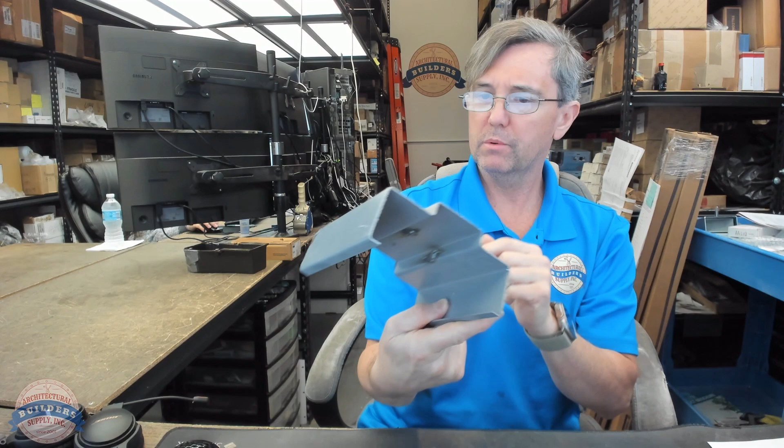So when it comes to masonry frames, you are very commonly going to butt the frame up to the end of a wall. And let me grab a jamb section. And here is a typical masonry profile. This is probably 5 3/4. I don't know who the manufacturer of this is. It doesn't matter. And with a masonry frame, you'll generally take this 5 3/4.

We'll talk about the anatomy in a moment, and you'll probably T-anchor that to a wall that's much thicker than 5 3/4. You could have face brick and block, and all of that together is some dimension like 9-inch. And the important part about a masonry frame is how deep is it, because I need to make sure that frame depth is really compatible with the thickness of my wall.

What's less important to know is what's the throat opening. And in fact, I would argue that it doesn't even matter what the throat opening is. I suppose you could say that, yeah, you do need to know what this size is. And the reason you may need to know that size, I imagine I've been asked that because, in that scenario, you get face brick and then block. The client wants to know how big is that, so he knows where to position this in the thickness of the wall, I suppose.

So it could also be just as convenient to know that the relationship between jamb depth and throat opening is throat opening equals jamb depth minus 1 inch. Except I had said why 4 7/8. On 5 3/4 frames, they will always have a 4 7/8 throat. That's because the return becomes 7/16 from ½ inch. So throat equals jamb depth minus 1 inch in all instances except 5 3/4.

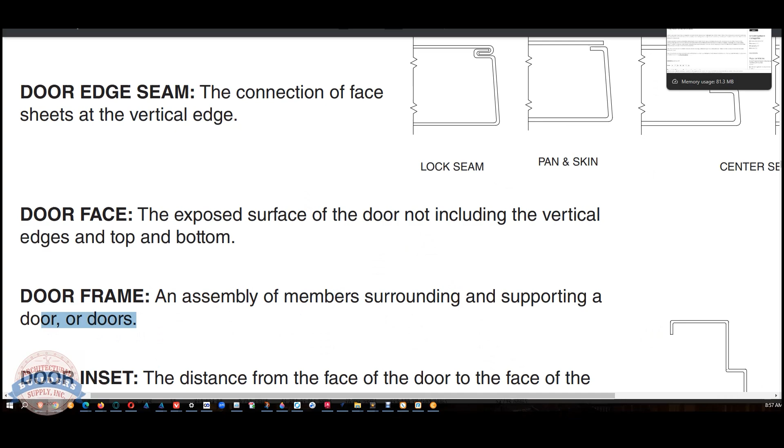Here's our definition: door frame, an assembly of members surrounding and supporting a door or doors. Okay, so let's take a dive into a technical manual. I've been using this DCI Hollow Metal on Demand. I don't know anything about their company, but I like their technical manual. They're probably, I wouldn't say a small size company, but compared to Ceco or Curries, I would think they'd classify themselves as small.

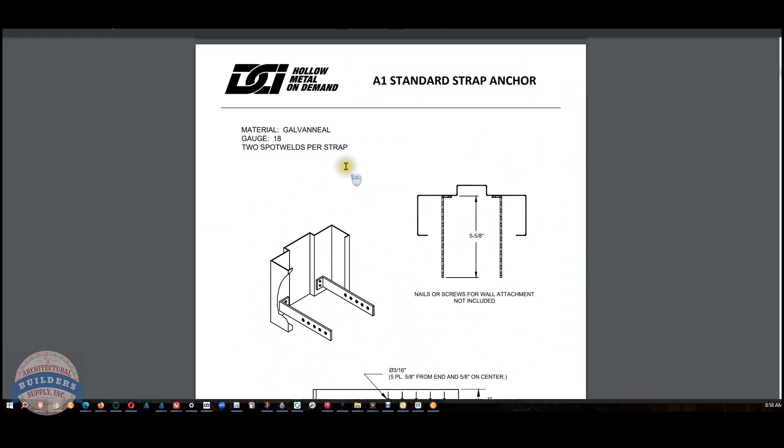Okay, so I had thought about earlier, we have to go through the different anchors that you'll end up seeing. And it looks like the beginning of the section is about frame, so we'll scroll through here and see. So an A1, their standard strap anchor. This is going to be for some type of stud construction, obviously. Probably wood studs would be my guess, is how that's going to be.

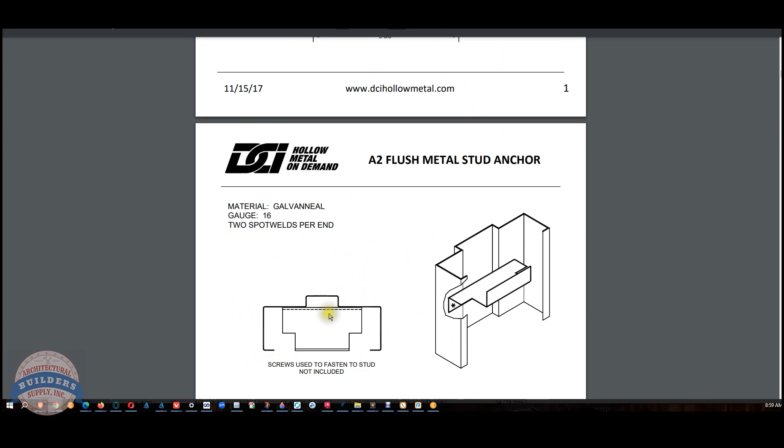Those will be welded in. You'll slide your straps around your stud. You'll screw through the face of those into the stud, and the drywall gets slid over it. Drywall has to penetrate at least 1/2 inch for fire rating. This would be a welded-in steel stud anchor. You'll run tiny mini screws through the back of the metal stud into this flange. Those are always welded in.

Many frame anchors must be welded in. Some frame anchors can be welded or shipped loose, and some can only be shipped loose. This is what I would call a Z anchor. Again, it's a metal stud anchor. Yeah, flush metal stud anchor. Okay, so flush. You'll notice here that this would be for an application where they are going to do all the framing. Probably just slightly larger than the outside dimension of the frame.

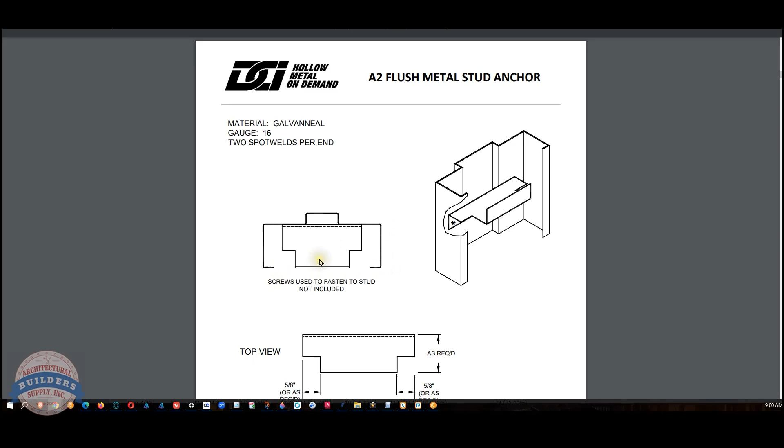Same concept, they'll zip through the back of those studs, and then the drywall will penetrate inside of here. So that's flush out here. In a standard metal stud anchor, it's not flush. That stud sits well inside of that throat opening. Okay, that's a floor anchor. Those are welded in. That allows you to take a welded frame and secure it down to the floor through the back of the frame.

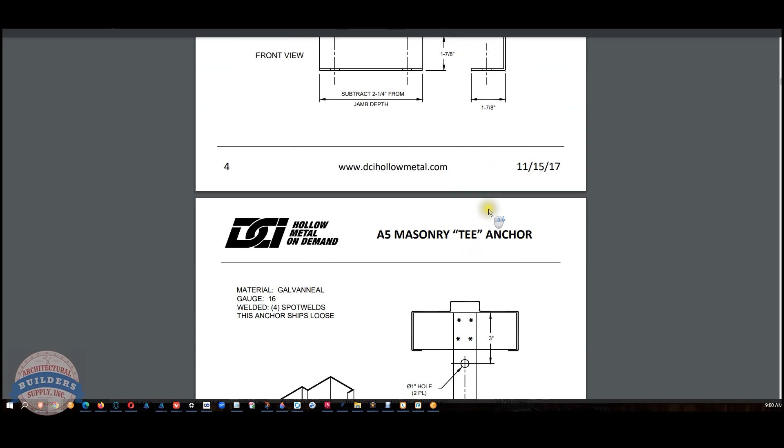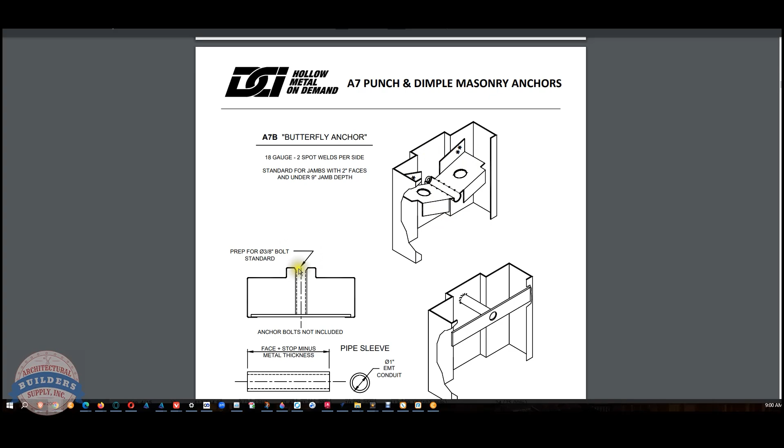That's a T anchor. That can't be welded in unless it's a welded-in T anchor. But T anchors like this are always loose, as are the alternate wire anchors. This is sometimes what's called a butterfly anchor, or an existing opening anchor or a multi-purpose anchor, because this can be shipped loose or welded. You can do a punch and dimple with this. It's never used, but you could run a stud through the back of it, I suppose.

This is an existing opening, what we would call a pipe anchor. It's best to be welded here and here so that when you tighten the bolt, you don't crush the frame in. This is an adjustable base anchor or adjustable floor anchor if you have a floor that's really out of level before, let's say, a concrete pour that'll occur or some flooring condition.

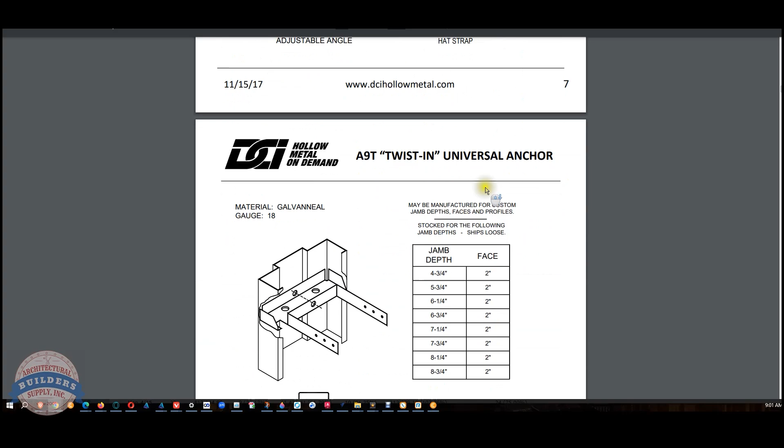This is a wood stud anchor. This is generally shipped loose. These would be for wood studs. Jamb depths are listed here. This is what they're calling a universal anchor. This is shipped loose. This could be used for wood studs or metal studs or a dimpled situation. All that would work. This is generally what's called a wood stud anchor. That is what this would be.

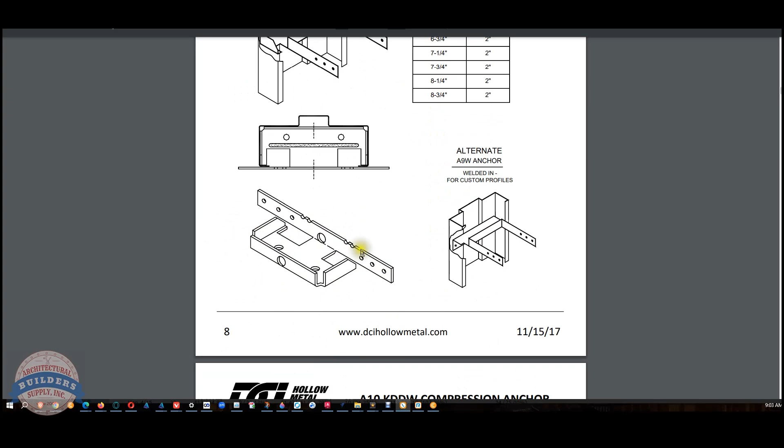Wood stud anchors are going to have these flanges because you won't run a screw through the thickness of a wood stud into this flange. You'd bend these tabs over, is what you'd end up doing. This is a compression anchor. This gets us squarely into the realm of drywall frames. I don't see a great picture of it, but this is a screw.

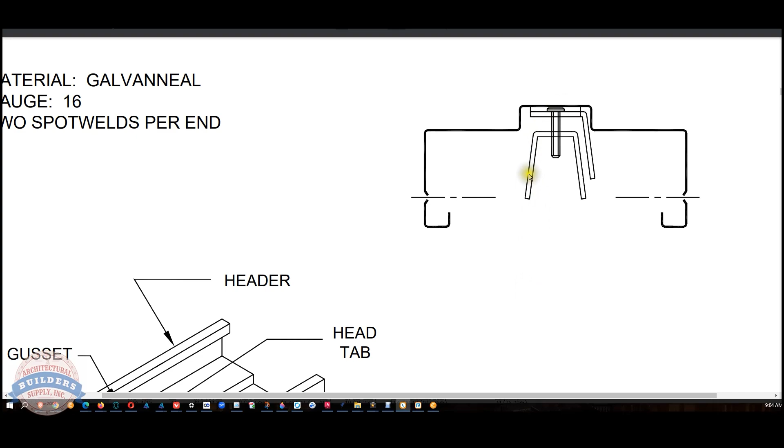And when you turn that counterclockwise, those threads will force that lug out in that direction. There's a stud sitting here. So as you loosen this one, the lug goes towards the stud. And when you do it on the other side, it forces the jambs. When the lugs go out, the jambs go in, and that compresses the header up here.

And they have a header tab on their drywall frames, obviously allowing you to help lock them in. And then, of course, that miter will keep it reasonably square up at the top. Drywall frames always have a dimple in the bottom. That's standard. But you can also see drywall frames with these straps that are here.

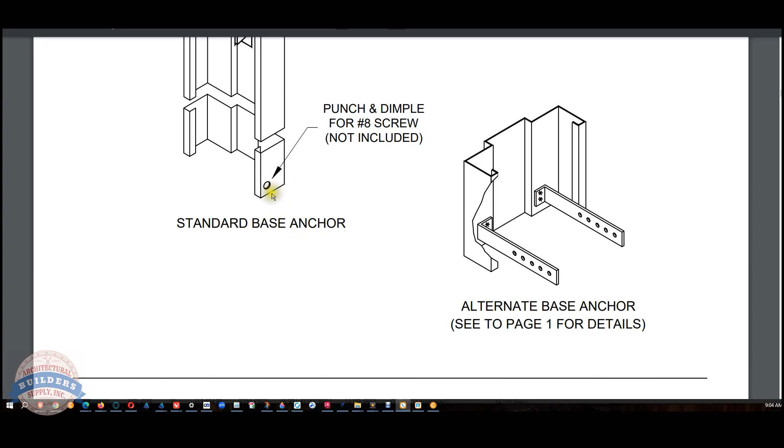But at the end of the day, I just don't see these being what you want, because generally in drywall frames, the drywall is already up as well, so this doesn't work. So you would use this and run a screw through the base of your jamb. I had said about the T anchor, those are always shipped loose except when they're not.

This is a weld-in T-anchor. These are great. I love these. Once upon a time, they were required for 3-hour fire ratings on UL openings. I like them because you can't forget them. If you walk out to the dock and your truck left 45 minutes ago and you see a box there, yep, that's the box of anchors that they forgot for the 20 frames.

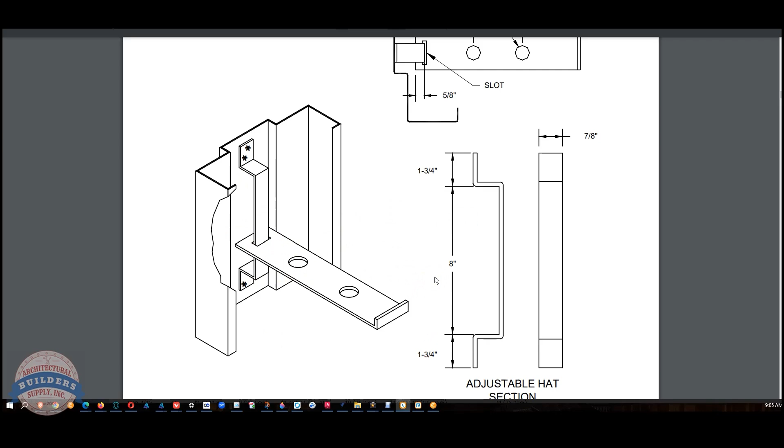These you can't forget. That's called a mullion anchor. I think they're using it as what's called a floor anchor here. You know, if you have a sidelight frame and you've got a sill on the floor, you'd have a floor anchor on the jamb, and then you'd have a mullion anchor under the mullion. I've really never seen floor anchors used that way, but if you had a wide enough sidelight, I could see how you would want that.

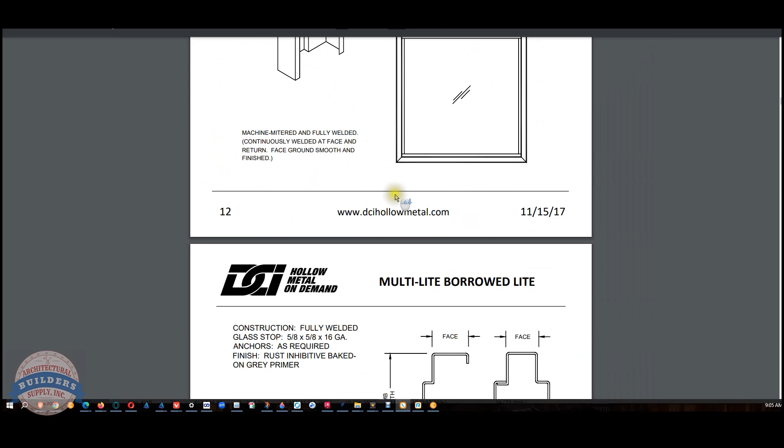They get into borrowed lites, but because we're doing door frames, we'll probably not talk as much about borrowed lites. Rough buck. Yeah, we talked about this earlier. This is a great example. So a buck is not the frame and it's not the wall. It's the part that handshakes the two together. So if you need an application where you want to put bucks onto the wall, you'll have to change your frame construction a little bit.

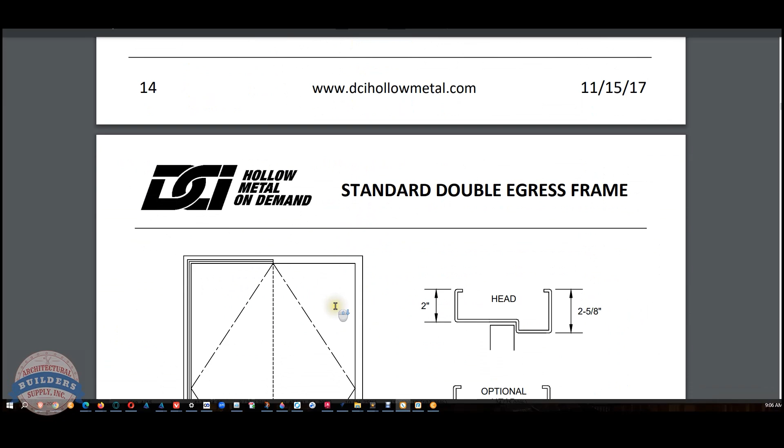Great example of a single rabbet versus our typical double rabbet. Great example, and actually they're using that as an example in a double egress frame. The jambs of double egress will always look like this. The header of a double egress will generally look like this, except you have to flip this around in your mind's eye when you're looking from the left side versus the right side.

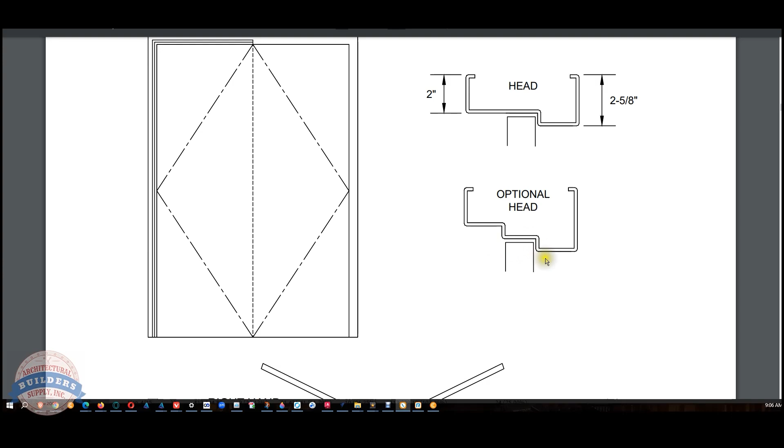You can also do a header like this on double egress, but it's a lot more work because you've got more to fill in on double egress. You've got 2 areas on each end to fill in. I would say it's more work because the setups aren't identical. This, you'll have 2 setups that are identical. And double egress is a very common frame type.

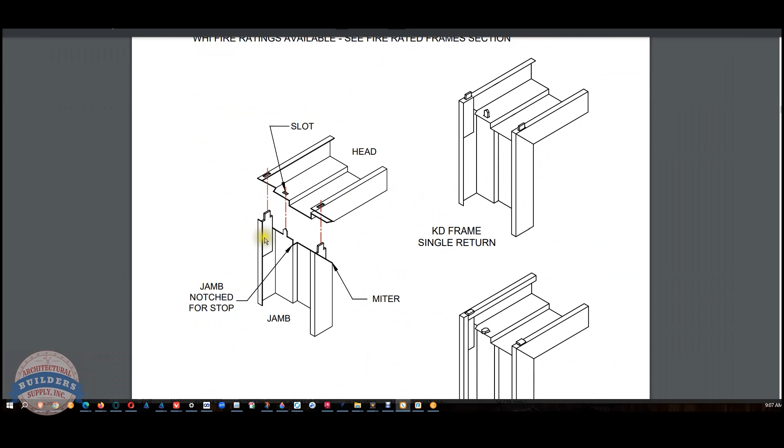Complete corner frame. This is showing us what a typical knockdown masonry frame looks like with the tabs and slots that I had mentioned. Then you can get into what you do when it comes to welding. Face welded, you'll weld the face of that jamb. You can do a full depth weld where you're welding the inside of this. You'll saw cut this material in full depth weld and weld the face. But those tabs and slots are a hallmark of masonry frames. That's what allows you to get them put together before you try to weld them together.

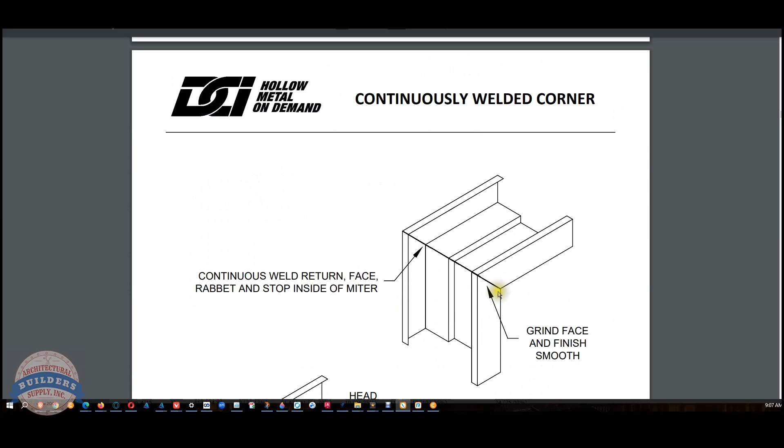Continuously welded is saw cut and then continuously welded, like it's called. You'll fill in weld back here. Whereas in a standard construction, you will have the ability to see some daylight. Not that you'd see daylight, but it's not completely welded back here. In a continuously welded frame, it would sure be argued that that's a stronger unit. But again, that's all saw cut before it's welded together out of stick material.

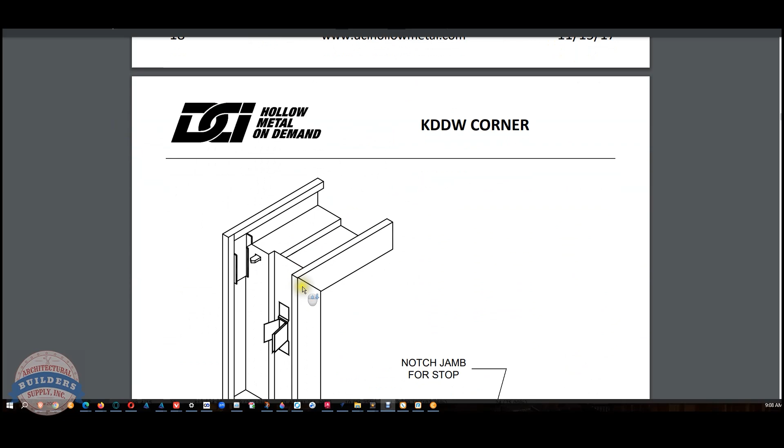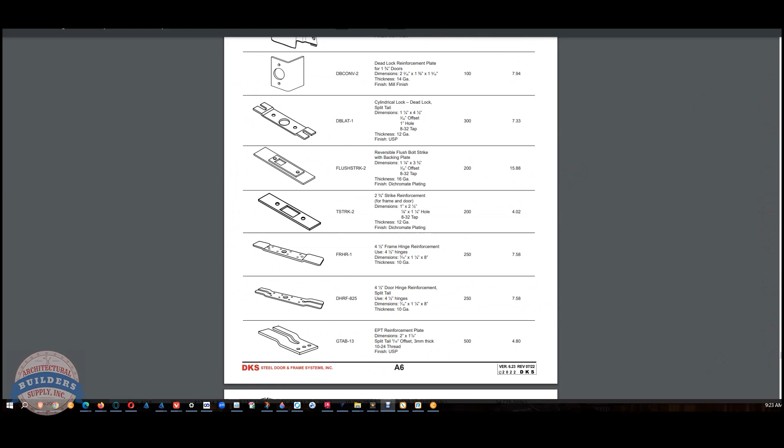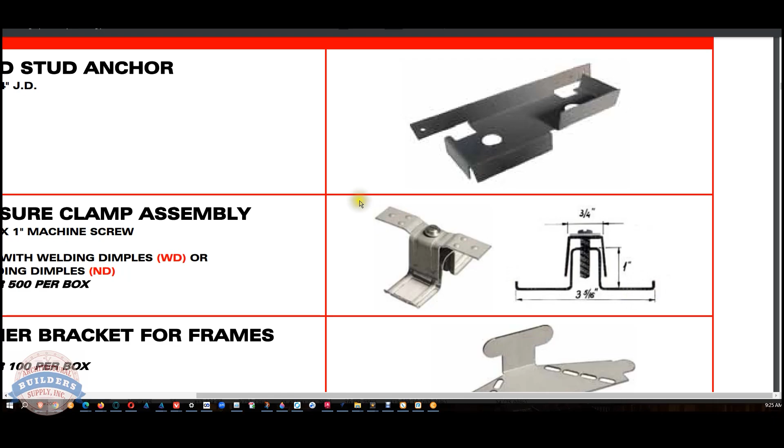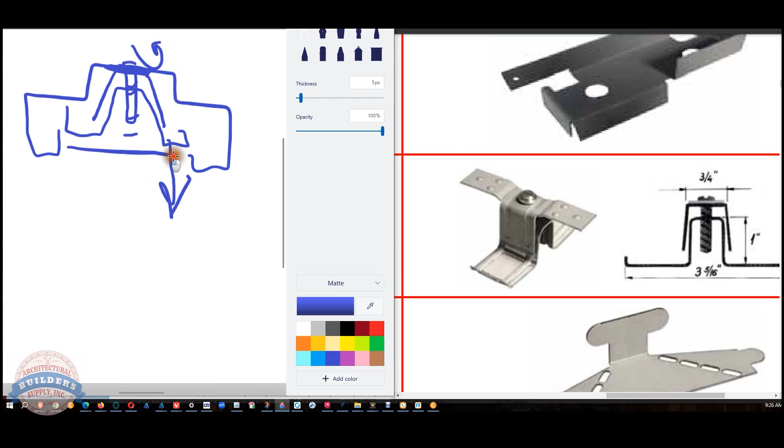A little bit better. Yeah, so this gray line that you're seeing here is this. This is what's welded to the inside. Here is a jamb. This is welded here. That's this gray line here. And you've got the bolt that fits in here. Then what happens is your plate goes in like this. And as you tighten that screw, that plate goes out, hits against your stud, and you do that on both sides, and that's how the compression works. Okay, back to the DCI manual.

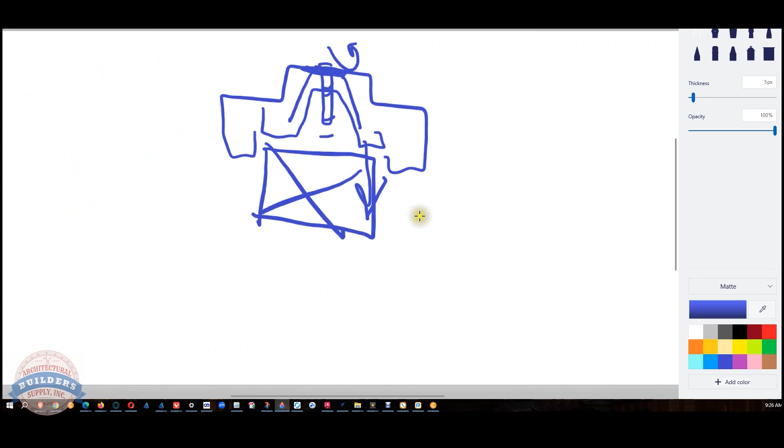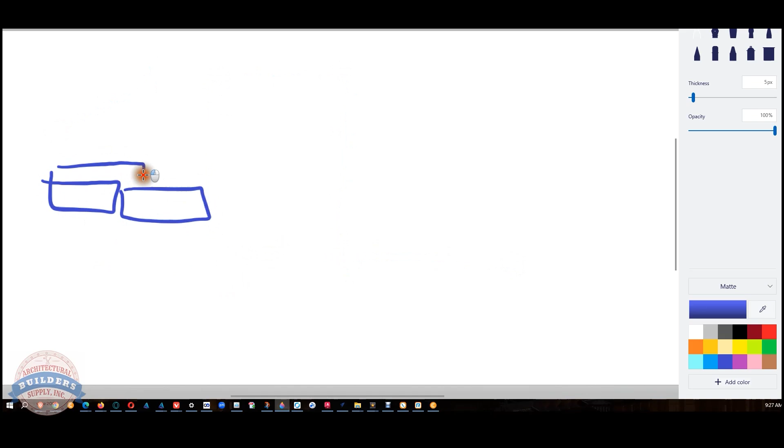4-inch header. That's very typical. Why does a 4-inch header exist? Well, your mason, when they are laying up a wall, okay? That's a wall. Well, the way that starts out is a block, and a block, and a block, and a block. Well, they're all supposed to be the same size, obviously, right? Well, you'll get to the header, and you want your block to be in line with the top of the head.

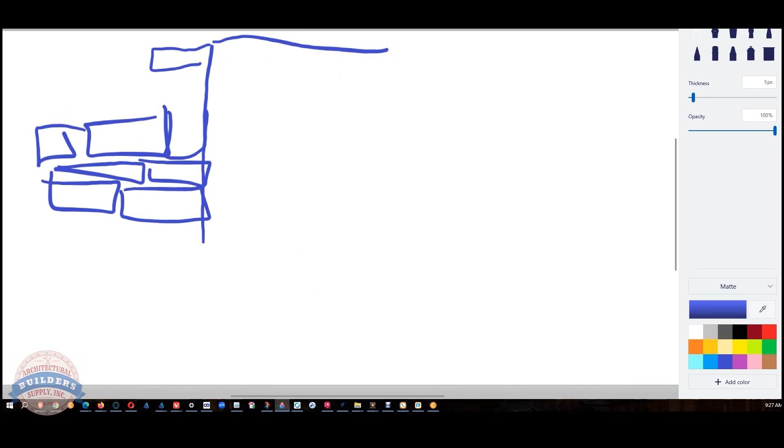So, if you took 86-inch, which is the overall height of a 7-0, and you divide that by 8, you don't get a good number. If you take 88 and you divide that by 8, you get a whole number, 11. A block is going to be 8-inch tall, if I recall correctly. So that's even. They won't have to chop.

You'll get a call from a mason, generally in Chicago in the old days, with a very thick attitude and accent, and wondering why they're yelling at you because they're cutting blocks. And you'll tell them, you never told me that you needed 4-inch headers. I don't assume what you're doing. You know I'm a mason. Yeah, well, sure. I do other things as well.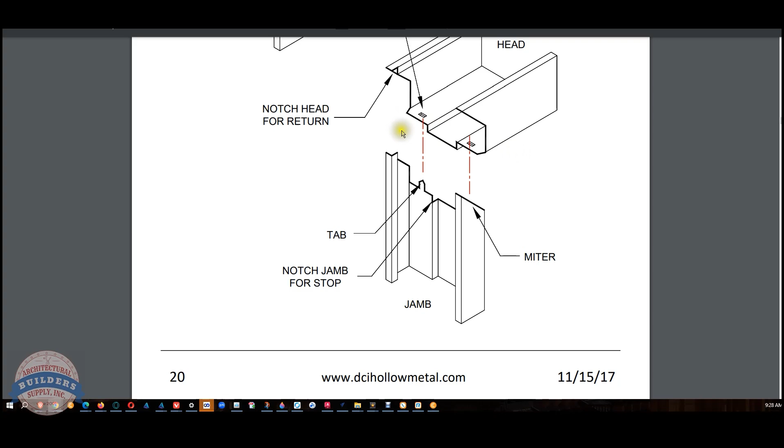The point of the matter is, if you're doing masonry construction and it's block, you better ask if a 4-inch header is needed. That'll be in the plans, but a lot of times it's not caught. This is a mullion. This can be done as hinge mullions, strike mullions, blank, transom bars. This could be as well. Different construction of how those go together. That would obviously be a mullion welded into a header, probably a sidelight frame, a T-intersection, a large sill, 4-inch, 8-inch, that's all pretty typical.

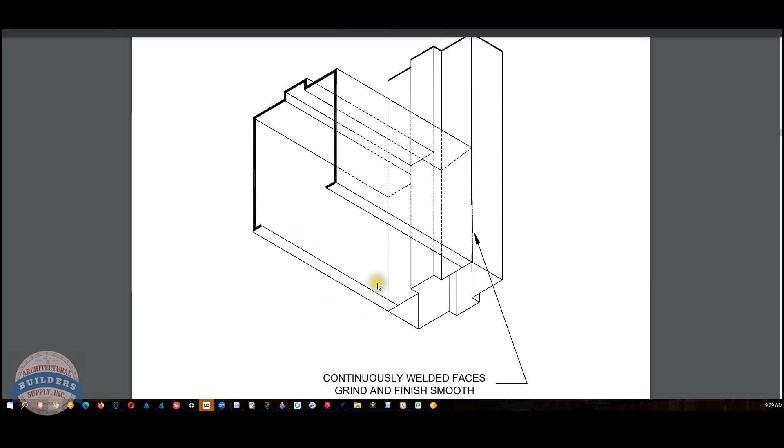A 2-inch profile at the floor does not make sense. It'll look unusual. At least a 4-inch sill. You'll stock 4-inch sill section probably. Anchors for transom bars or whatever it is. Showing a transom panel going in. Obviously a welded pocket door frame. There you go. That's another specialty type that you can do in hollow metal as well. That's neat. Reinforcements that will go into a frame.

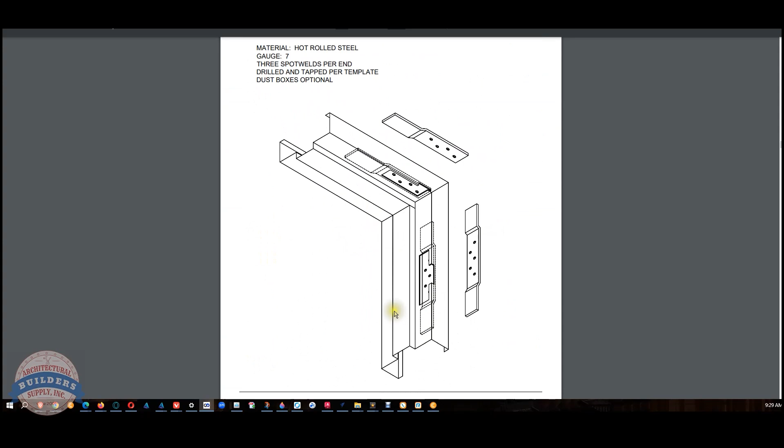This is obviously for, I'm going to go with a top and intermediate pivot. Yep, top intermediate pivots. Hinge preps. Anchor frame prep, most likely. Yeah, anchor hinge prep. Anchor hinges are really neat. If you've never seen them, and if you do school work, you'll bump into them eventually. That's what an anchor hinge looks like. These straps really keep the door proud, exactly where it's supposed to be, proudly standing without sagging is what I'm trying to say.

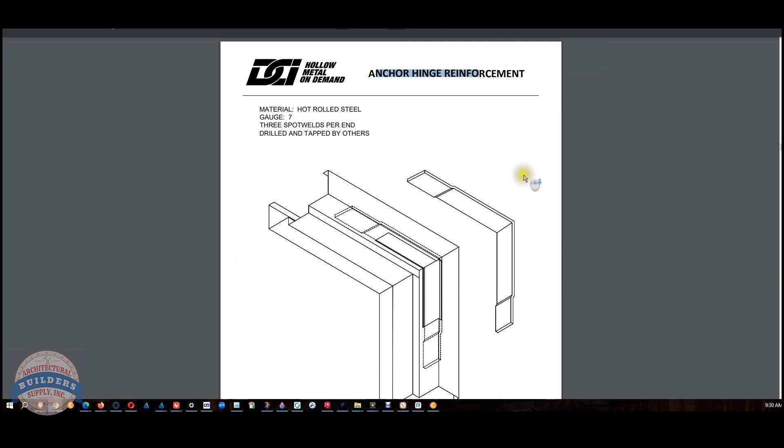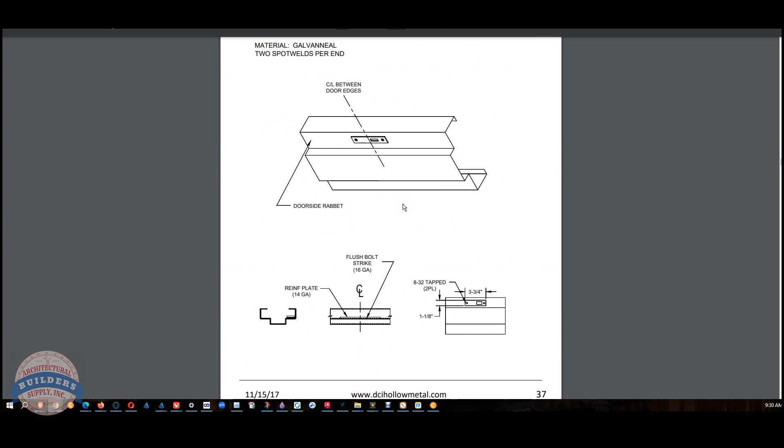More hinge preps, heavy duty hinge reinforcements, a lot more steel to weld, a thicker gauge most likely. Pocket pivot prep is what that would be. Pocket pivots are these. They're also known as Harmon hinges. Obviously a strike prep, 2 3/4 strike prep probably. Dust boxes, mortar guards, those are very typical and common in masonry frames. You better have them there if you're supplying a frame to a mason. Cover everything that grout could get into and block up.

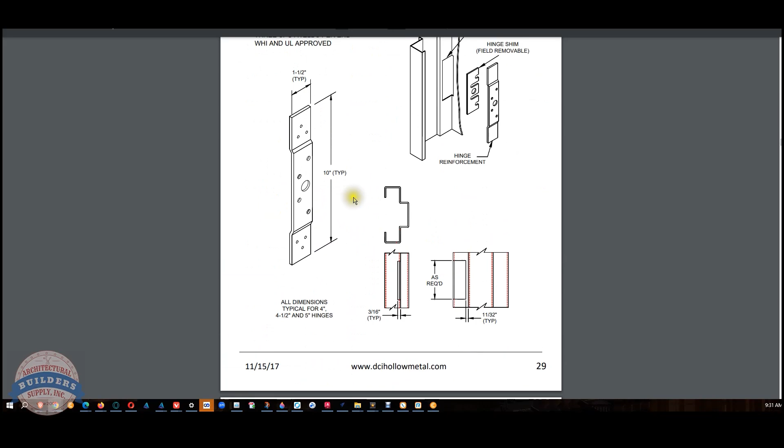I've had installers call me and blame me for the fact that the mason packed full all their screw holes. And I says, well, how did they do that? Well, actually what's occurred is I've been called out to a job, and it was all pure concrete behind here, just packed in hardened mortar, he couldn't run his screws through. And I said, well, I'm not the frame supplier. He's like, yeah, I know that, but what do I do? That's where someone's using a drywall frame or has removed the mortar guards for some reason, or the mortar or dust guards just weren't on the frame.

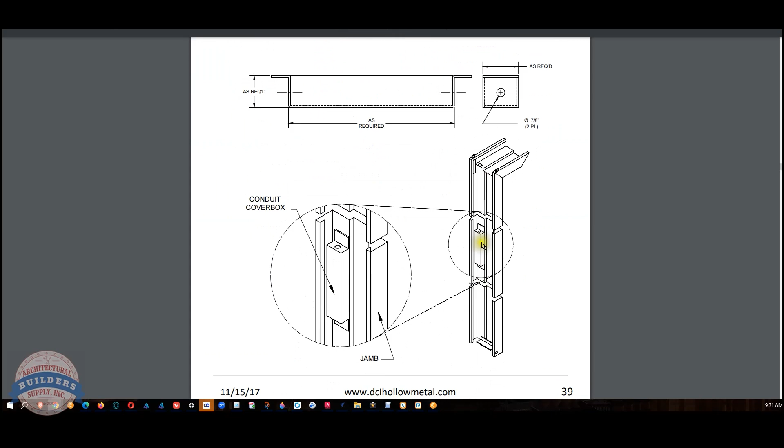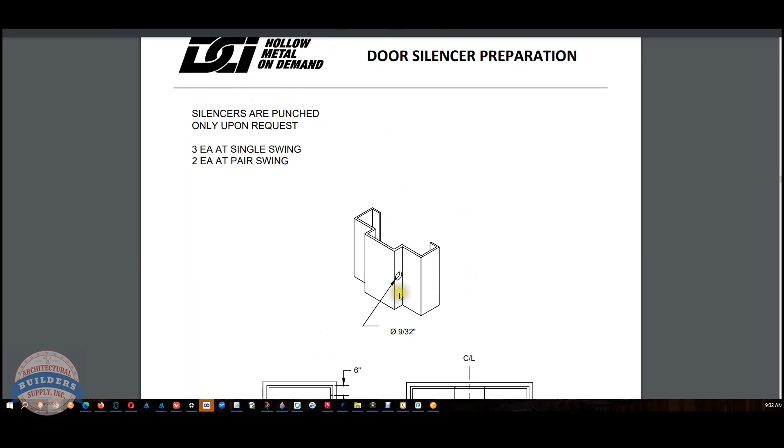Conduit, you're going to run generally low voltage, doesn't have to be low voltage. You'll have a box for that and a conduit raceway for that. Filler plates, etc. Preps in jambs for silencers. You don't have to specify that. There are times, though, that I do have it in my part number where I don't want it. If I'm doing weather stripping, I'm going to tell the factory no silencer holes. There's no need to have them. I'm going to have stop-mounted gasketing, and I don't want there to be an interruption. These are what's called terminated or hospital stops, generally on a miter, 45. They can be at 90 degree.

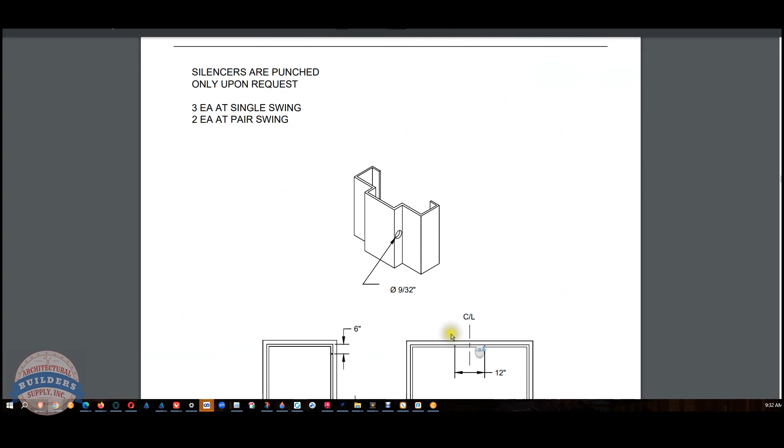They're meant to facilitate the cleaning of the floor and jamb area better than a frame that's got rabbets around the bottom of it like this. Inside corners are harder to keep clean than no inside corners. Frame profiles, yeah, this is neat as well.

This is interesting. In the 50s and 60s, I know Pioneer had a really well-developed catalog in terms of really fun profiles. F1, standard double rabbet. F2, single rabbet, with backbend returns. A quirky style backbend return. A shadow line is what this might be called. You can create a shadow line with this as well. The purpose of this, I'm not exactly sure of what that would be.

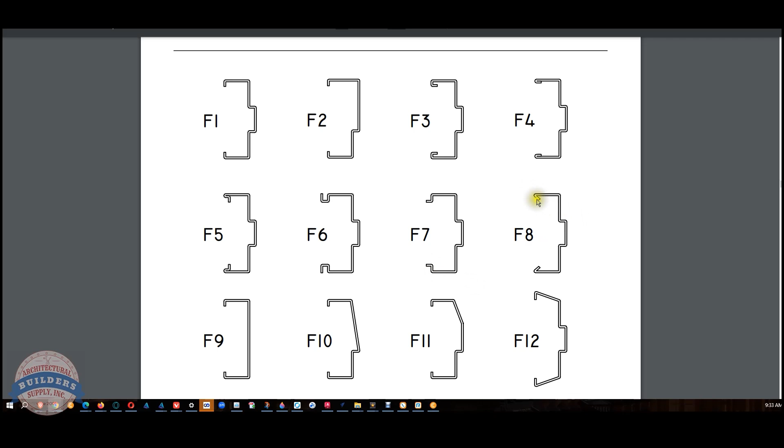Cased opening frames, another specialty type used for double acting doors or just used to terminate a wall. You can have an angled sort of single rabbet. Those are fun. Same on the face as well. You got to be really careful with that because you're reducing the size of your soffit. This is a stop applied to a cased opening frame, double rabbet. Perhaps more of a residential look on a hollow metal frame.

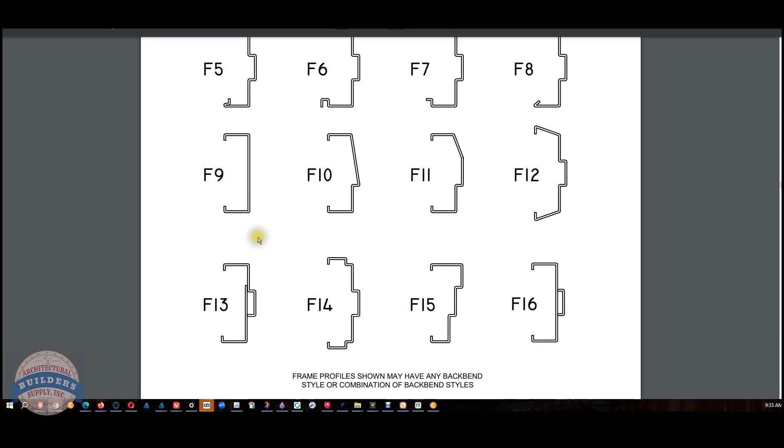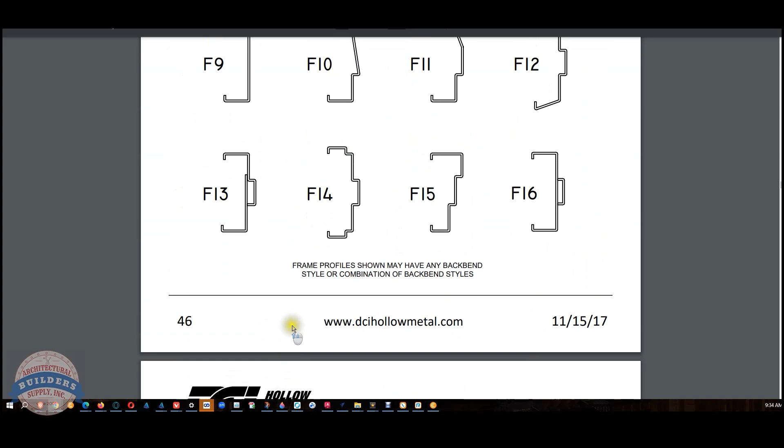And then, of course, in terms of variables, that 2-inch can get down as far as possibly 3/4. Back in the old days, we used to stock 2-inch face, 1 3/4, 1.5 inches, 1.25, and with those, I could pretty much make anything. The F13, that would be a split frame, where you're going to encapsulate a wall that is irregular, and you could run a screw right through this and hold all that together. Pioneer used to have convex faces out here as well, a lot of curved stuff. I don't have an old Pioneer catalog to show you, but nonetheless.

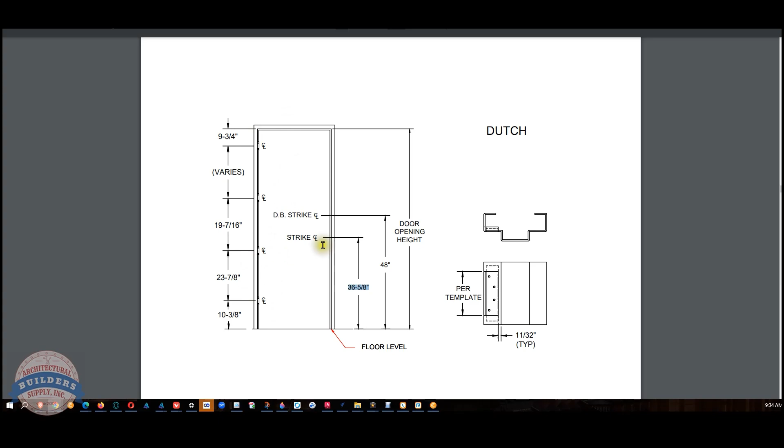Hinge preps, obviously. Dutch door frames. We're talking about frames. Obviously, a Dutch door frame is pretty typical. You'll have a strike prep that's going to be generally lowered, and it certainly is here. You'll have hinges that are meant to have 2 half door leaves. It's not just cut it in half. Those are adjusted for that.

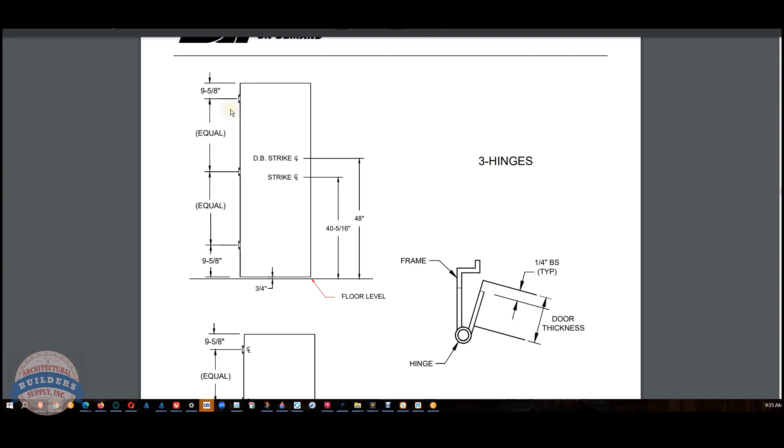The height, what's neat is 10 3/8, 23 7/8, and 19 7/16 will always stay the same between 6/8, 7/0, 8/0, and so on. That's what'll vary. Showing standard locations for this manufacturer's material. That's just what they do. Keeps it easy. These are top to center lines. So 9 5/8 minus 2 1/4 is going to be 7 3/8. So that's a standard Steelcraft or Amweld location. Dutch door locations on a door. Now apparently we're into doors now, honeycomb. Yeah, so we'll hop out of that.

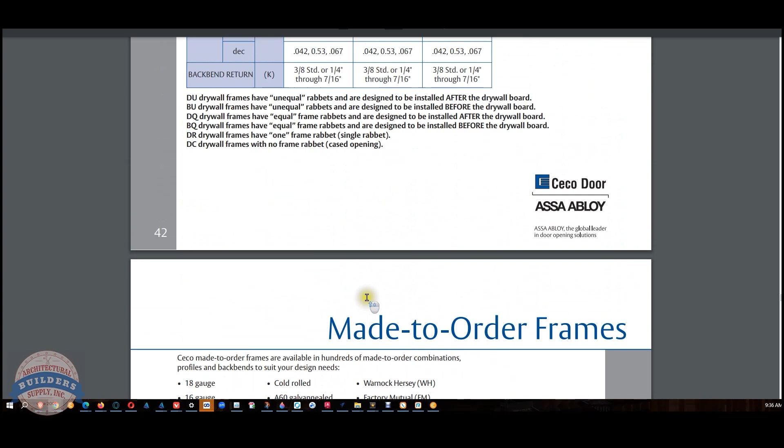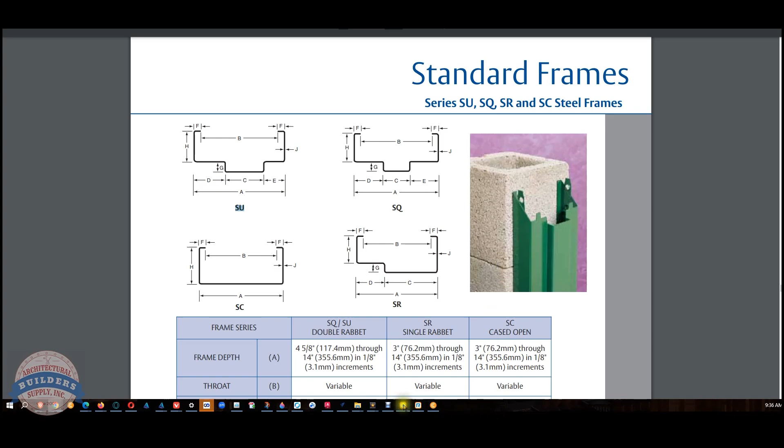And then I guess the last thing that I would show you would be the manufacturer's price list, and we'll just get into that quickly. Actually, we'll look at the product catalog first, just an old Ceco product catalog, and we'll take a look at some standard frames. Alternate profiles, as we just talked about, alternate backbends. Okay, so SU is a standard Ceco masonry frame profile, unequal rabbet. You want equal rabbet? You can have that, no problem at all. I believe the SQ is an equal rabbet.

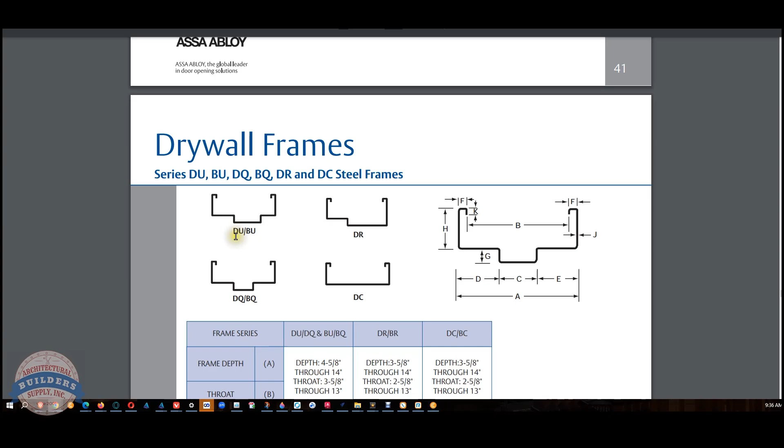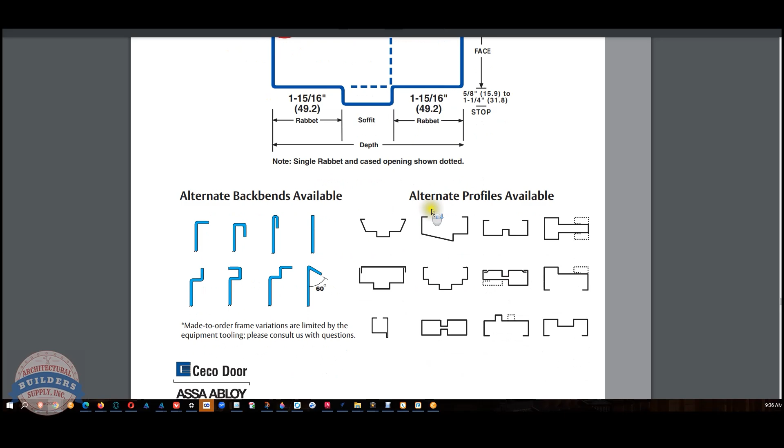You hop down to drywall frames. You got your DU and your DQ. I think the difference between D and B is equal or unequal rabbet. Don't quote me on that. I'd have to study that in the catalog. Made-to-order frames. Yeah, this is a great example of everything has to be tailored when it comes to this material. The only time you'll have a limitation or something you cannot have is when the machinery just can't do it. You're asking for a bend that's too small or in an area that's just simply too tight.

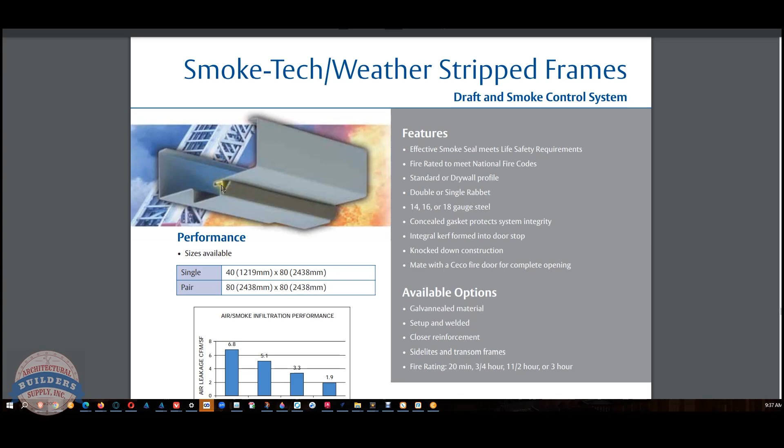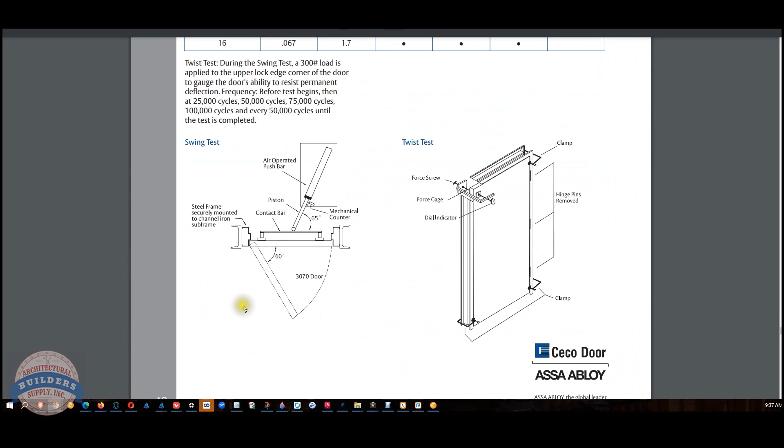This would be an integrated weather strip frame that will take a Q-Lon type material that's got a kerf in it. It's not a kerf, it's just the way that they bent that frame. Possibly roll formed, but I'm not really sure. Thermal break frames, there is literally no steel touching the exterior or interior of a frame. Pre-finishing is very much available. I believe it would have a very high minimum quantity requirement, hundreds probably. Performance data, yeah, showing how they test the material. Windstorm products, and now we're back to doors.

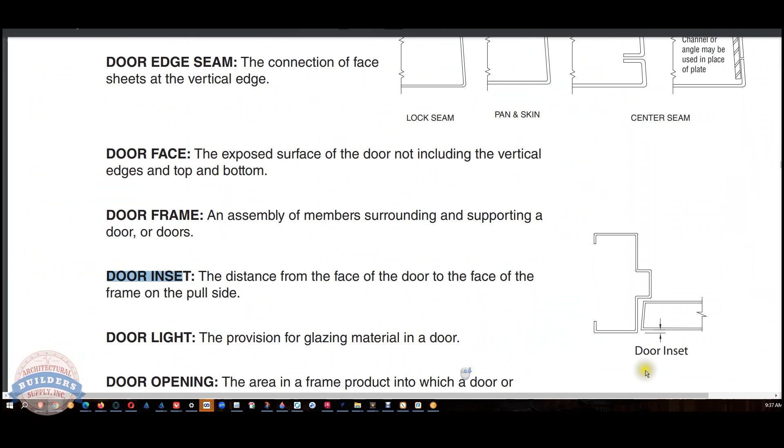Okay, that will conclude our discussion of door frames. Door inset, that's the next thing to talk about. That's really important. Let's go on to door inset next.